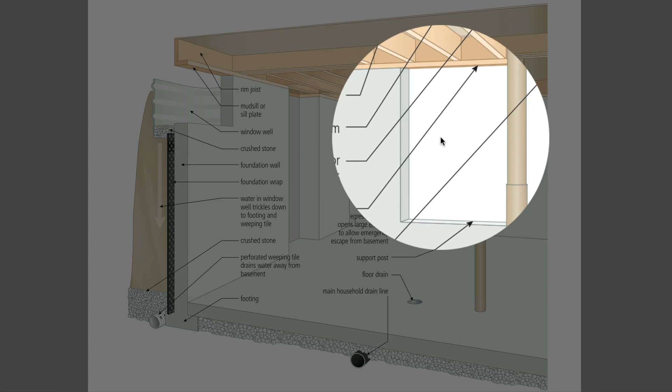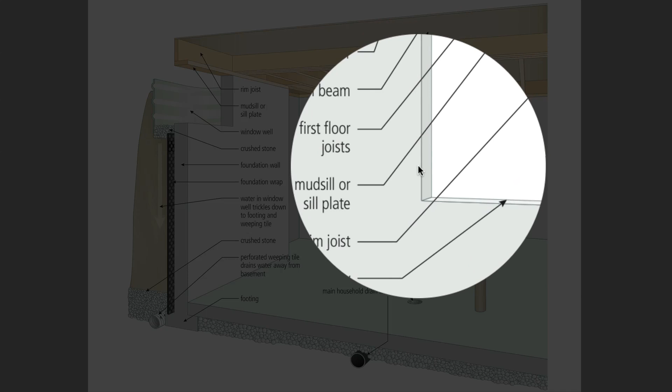Also, standing here in the basement, there's this large window. That's labeled here an egress window. Egress means the ability to get out of something. Chances are very slim that your basement has a window of this size. You will need to add one, either that or some sort of an outside entrance, because people do need to get out of basements in case of an emergency. So you're not likely to see an egress window just yet, but you will see other things, like a support post.

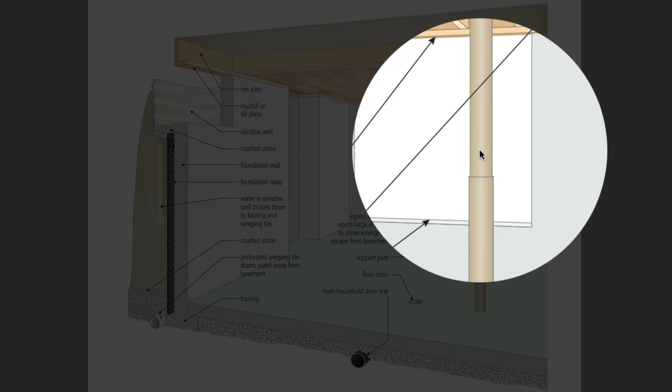Most of them are round steel pipes, like what you see here, and they can be finished and made to look pretty later, and I'll be covering that. You're also going to see what are called the first floor joists here. These form the floor framework that holds up the floor of your upstairs, and they also function as the ceiling joists for your finished basement.

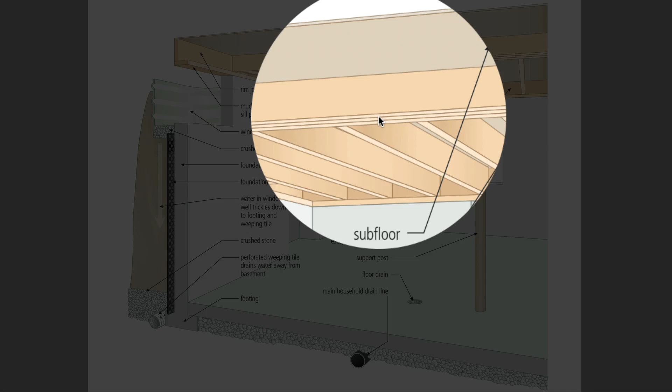The support posts, which are pretty much universal in any basement, will be holding up some kind of a beam. In this case, as you can see here, this is a composite beam, so it's made up of 3 or 4 or maybe 5 pieces of 1.5-inch thick lumber. They're spiked together, and they form a beam. That beam could be metal as well. Either way, it's doing the job of distributing the support delivered by the posts.

One very important area that you need to understand is the rim joist zone. This is where the outside edges of the floor frame meet the outside of your home. And it's an area that's almost universally finished badly in a way that does promote mold and mildew growth. The reason is because there's very little material between the inside of the rim joist and the outside of the house, and in cold climates, there can be condensation that develops there during winter.

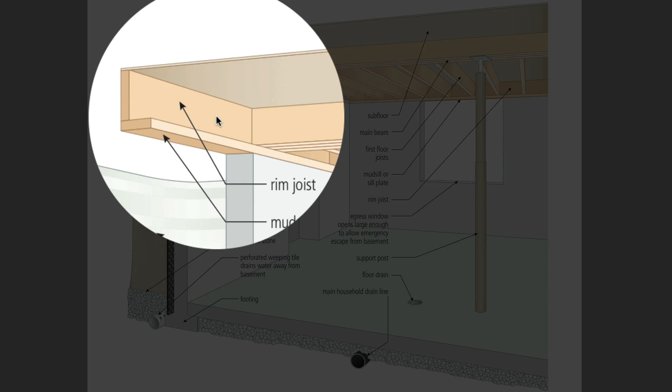It's impossible, actually, to insulate and finish the rim joist area properly with fiber-based insulation and typical vapor barriers. I'm going to be expanding on that and explaining more to you about how you can finish the rim joist properly, but you really do need to keep that zone in mind.

Now, moving to the outside of the basement, we've got some things going on that you won't see, but you should know about. Down at the bottom, we have some weeping tile. This is a flexible, large diameter pipe, maybe 4 inches in diameter or so, and it's got holes in it, and its job is to provide a place for water outside your basement to collect and flow away. So this weeping tile will be connected to something that's lower than itself. It will have to extend to a spot that's lower than your house so that the water from the outside of the basement can drain away.

In order for the weeping tile to work, it needs to be surrounded by crushed stone of some kind or very loose, light soil, sandy, gravelly kinds of soil, so that there's spaces between the particles to provide a place for the water to go. Same goes up here too on the window well. It has to have a drainable bottom so that when rainwater does go in, it can drain downward and not pool on the bottom.

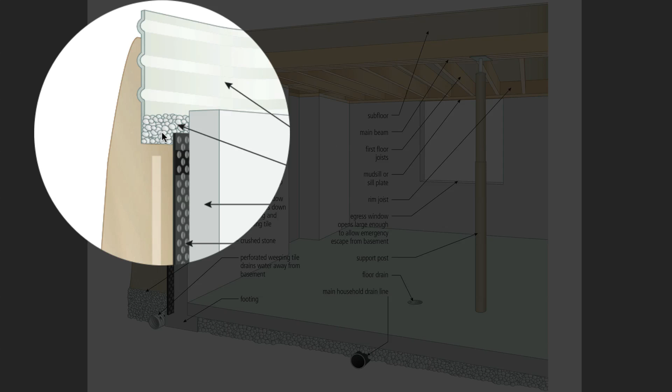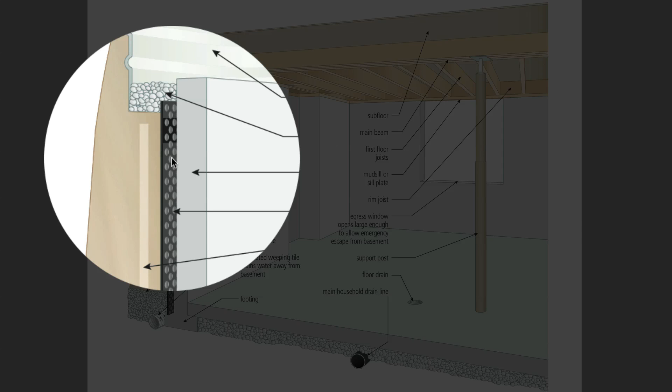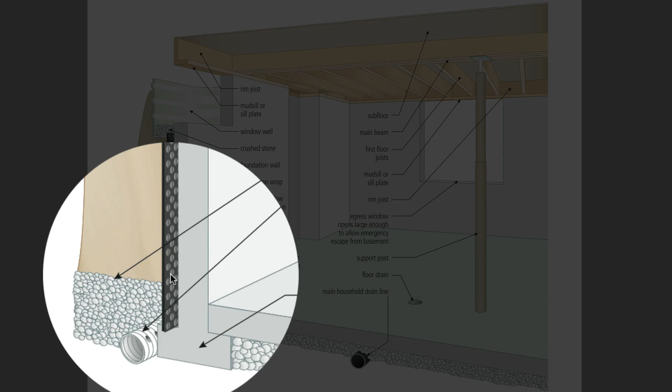Now, a fairly recent innovation that is very effective is this dimpled foundation wrap that you see on the outside. It's impervious to water. It's fairly thick. It's plastic, and it has these little round dimples on it that hold it away from the basement wall. So what that does is it creates a small, thin, but effective vertical drainage channel that allows the water that's in the soil here to drain downwards and to connect in with the weeping tile. And what that does is it removes the soil pressure from the equation.

If water is present in the soil and there's the full weight of the soil pressing against the foundation wall, there's going to be a tremendous amount of pressure forcing that water horizontally through your wall. And if there's water there, it can pass through completely sound concrete or concrete blocks. Those materials are kind of porous, and that's one of the reasons why basements leak so much.

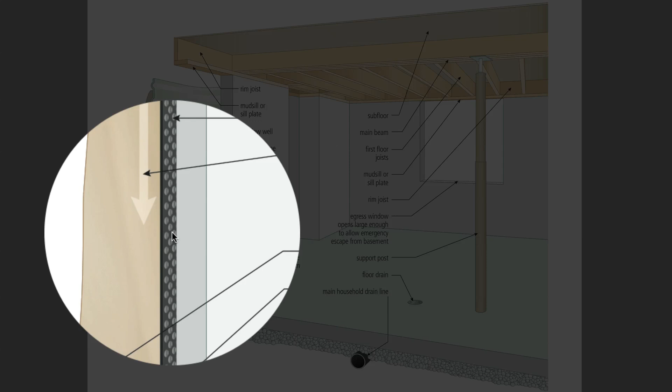So this foundation wrap creates vertical drainage channels where the soil is not applying pressure everywhere against the foundation wall. And without that pressure, the water will take the path of least resistance, which is to move downward, not going inside your basement, and then connecting with the crushed stone and the weeping tile that's going to take that water away.

So, why am I telling you all this? Well, you probably don't know whether or not you have foundation wrap around the outside of your basement. And if your basement does not leak, then that's fine. You don't need foundation wrap to prevent leaking, but if you need to do some remedial action in order to dry out your basement before finishing, and I'll explain how you can determine that and what the different steps are, foundation wrap is definitely something that you're going to want to consider. You're going to want to know about that.

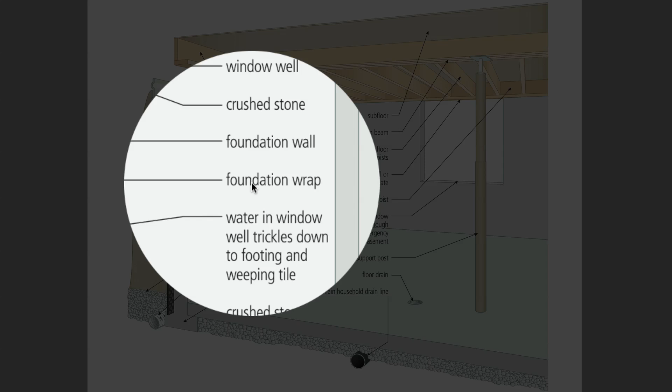And that's true whether or not you intend to install it yourself, which is rather difficult for a homeowner. You really do need to know about it so that you can direct any contractor properly and you can understand what they're talking about and how things are supposed to work.

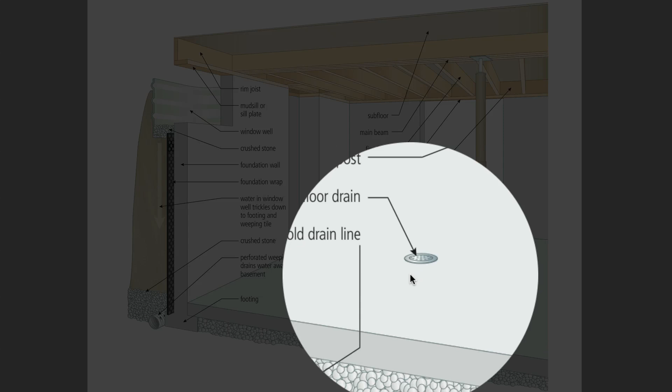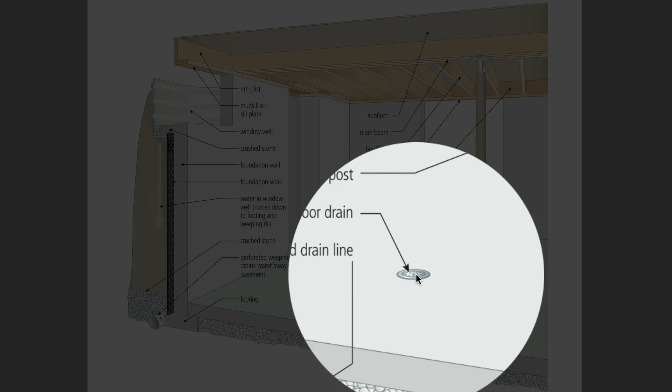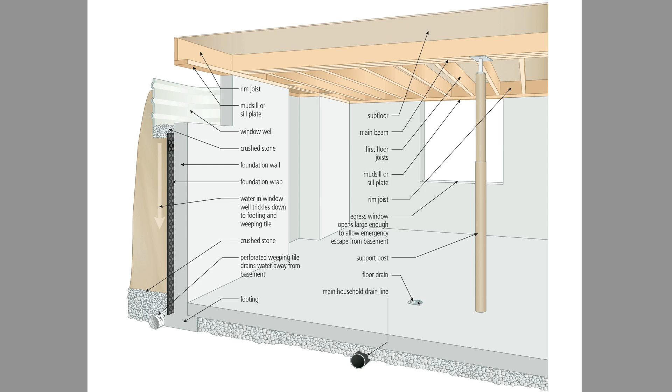So there are lots of other things I'm going to be talking to you about in terms of the anatomy of the basement. One is the floor drain, how to connect into it for drains for a bathroom or kitchen, how you can install a backwater valve to prevent sewage backup from bubbling up from this floor drain under unfortunate conditions and ruining your basement. Thousands of basements are ruined every year precisely because of that dynamic. And lots of other things, but understanding what a basement looks like and all the different parts is a great way for us to begin.